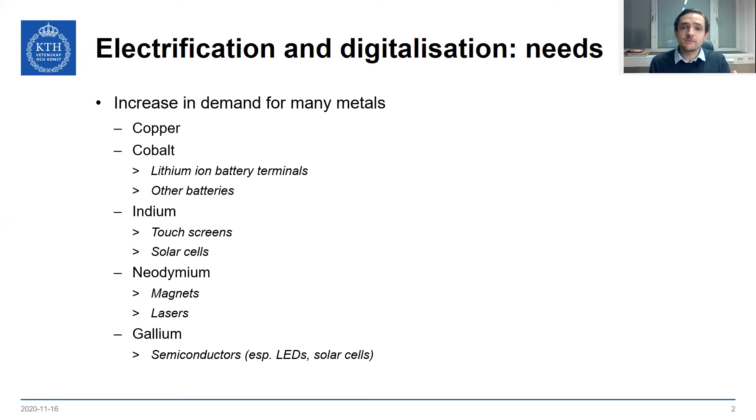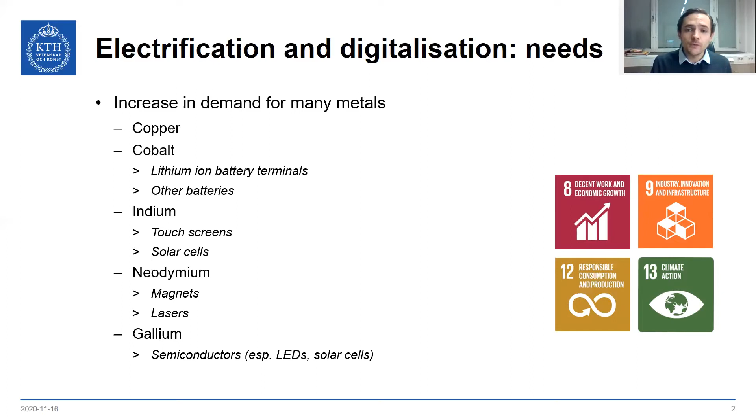Neodymium is also extremely rare, classified as a critical material by the European Union, and that's used in neodymium iron boron magnets and also a lot of different kinds of laser. And gallium often forms very useful band gaps in semiconductors, gallium nitride, gallium arsenide, close to optical wavelengths, and so it's got a huge application in LEDs and solar cells. Everything there except copper is in critical supply. And it will threaten digitalization and electrification, which will contribute to the 4 United Nations Sustainable Development Goals on the screen. Hopefully by the end of the talk you'll understand how we can help with that.

So what is the proposal? What are we suggesting? Well, firstly, we're going to take all the waste in Sweden and we're going to extract all these critical materials, maybe some non-critical ones too. For example, in waste electronics, we can take out a lot of the critical metals from there, and also other metals, like people throw away a lot of copper, a lot of aluminium. We could even recycle those in the same way and turn them into powders. And the motivation of turning them into powders is that you don't need as much material to have an economical process than you do if you're making bulk ingots.

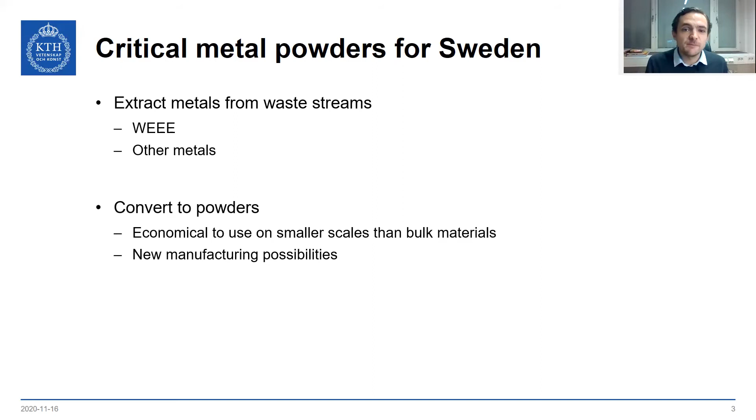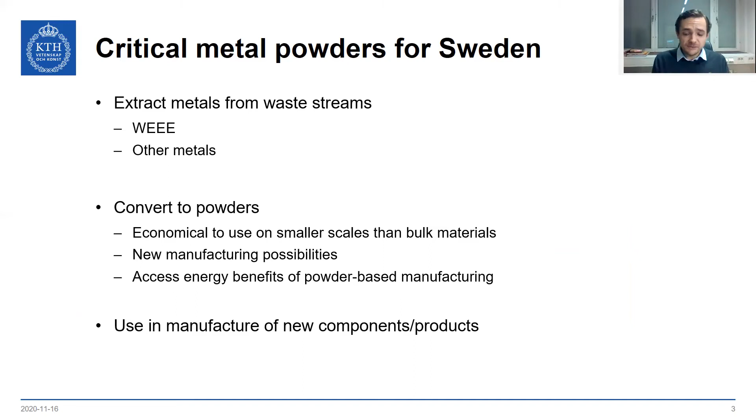It also opens up the door to manufacturing routes that require metal powder, especially additive manufacturing, and that's where a lot of excitement lies at the minute. That also gives you the access to these technologies, which generally require less energy than traditional manufacturing routes. We then use those powders to make new things. We could do all that in Sweden. Okay? Because we already have a good municipal collection infrastructure in Sweden. There are a lot of recycling stations where people can take electronic waste, and you can also drop it off at the local hardware store quite often as well.

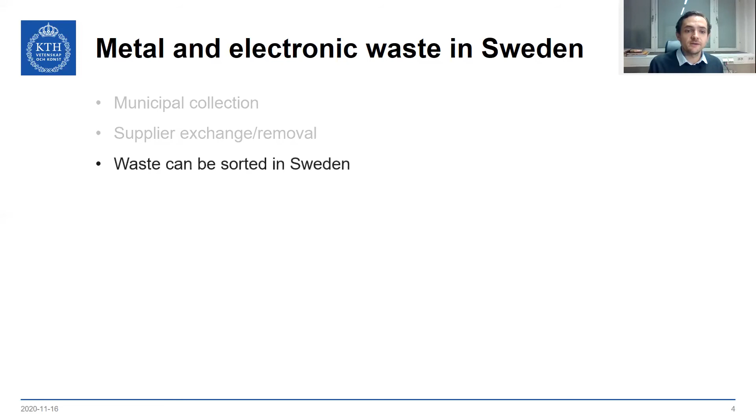If a company goes in and installs things like new routers or new motors in a factory, they often take away old components as part of that service. Those components can be recycled too. We already have the facilities to sort and process this waste within Sweden, and definitely we have the infrastructure to produce metal powders, I promise you that. Sweden produces about 25% of the world's metal powders today. We also have a lot of companies that can take this powder and do really clever things with it.

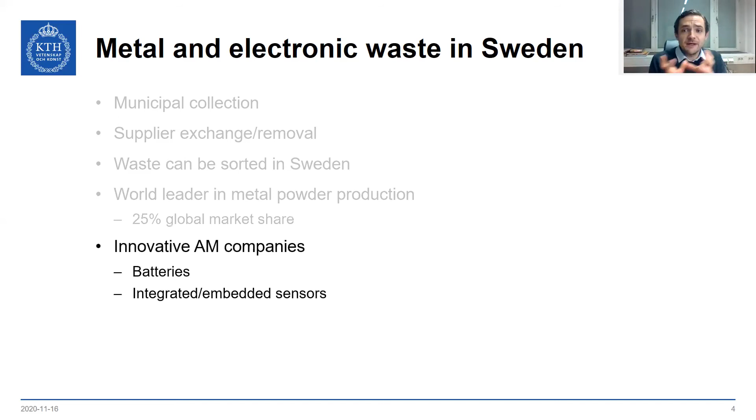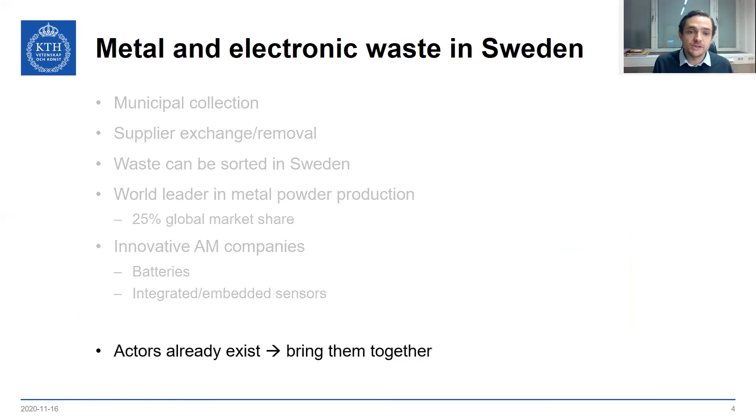In literature, there are examples of using additive manufacturing to create batteries, and also to 3D print sensors directly into other components, making the component and the sensor with additive manufacturing and making it in a way that can't be made traditionally. All these actors exist. What we want to do is bring them all together. Where do the energy benefits come from? Well, with powders you can make things that are almost in the final shape. You just need a tiny bit of finishing to get exactly the right shape, rather than starting with a large block and cutting it down and grinding bits away, all of which has to be either wasted or recycled.

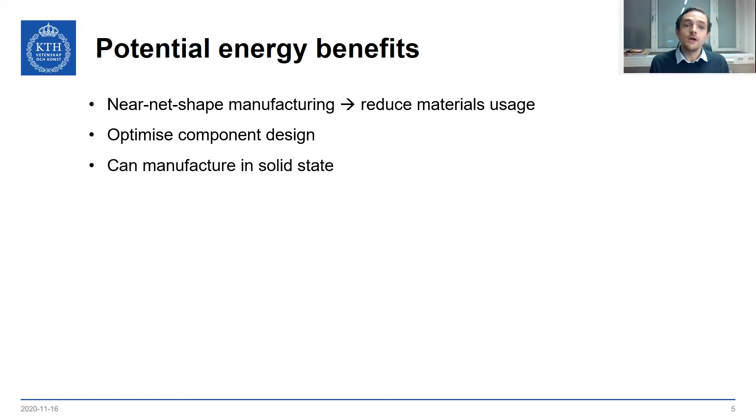Therefore, we reduce our materials consumption, reduce our energy consumption. We can make components that can work in a more energy efficient way. For example, in a car, something that could be lighter and yet do the same mechanical job, saving fuel. Again, an energy saving, especially if we have electric cars. We can do manufacturing without melting the powders in very many cases, but even if we do melt the powder, we only melt it where it's needed to be melted, rather than melting all of the volume of our metal and casting, for example.

With 3D printing and other powder-based processes, you can manufacture lots of different components in one facility rather than needing very specialist equipment to do every single component. That means you could have a lot of local manufacturing centres using this reclaimed powder to produce new components, all on a local level, definitely all within Sweden. That's going to reduce transport costs and energy expense in that sector as well.

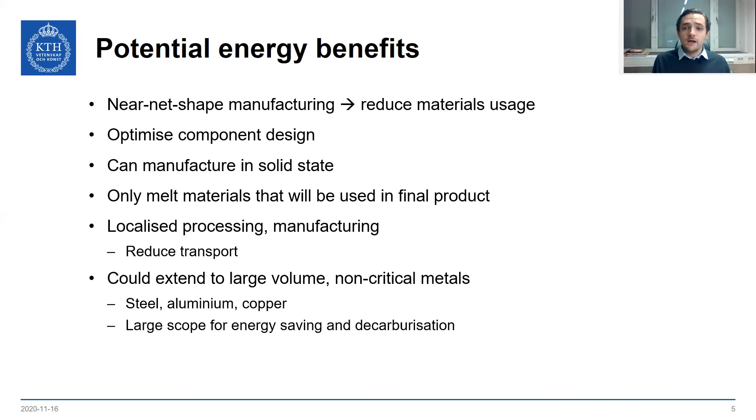And of course, if we get the market right for this, we could expand the idea to large volume non-critical materials like aluminium, copper, steel, things that require huge amounts of energy today and are very polluting. And with that, we can definitely contribute in lots of ways to all of those United Nations Sustainable Development Goals that I introduced at the start.